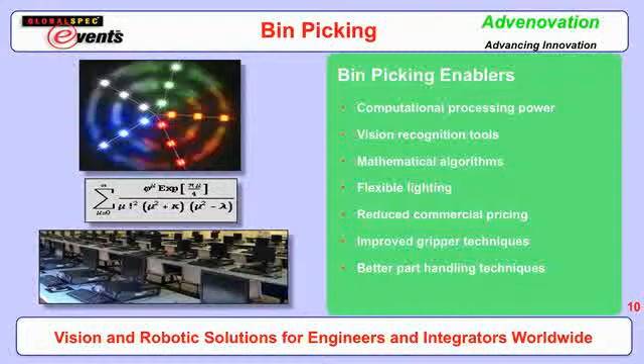In industry, these are some of the enablers that are causing bin picking to become easier. But at the end of the day, everything must work, and I'll cover these issues as we go forward here.

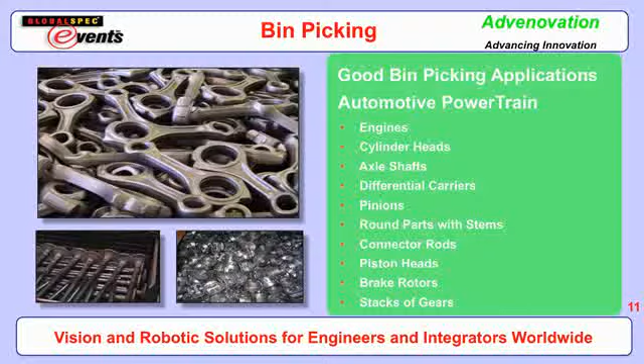Let me outline some good applications by certain vertical markets that already have been proven and are quite feasible to do: engine blocks, cylinder heads, axle shafts in powertrain, differential carriers, pinions, round parts with stems, connector rods, piston heads, brake rotors, and stacks of gears. These are parts typically found in powertrain applications, engine type related applications, and a lot of the key components that make up these powertrain products are bin pickable.

So that's a very encouraging sign. Next, let's take a look at automotive stamping. These are situations where flat metal is bent with heavy presses to form the shape of a door or a roof or a hood. Typically when these parts are stamped, we also get holes that are used to weld or join with other smaller parts.

Progressive stacked stampings are typically smaller parts that attach or are welded to a bigger part like a door, and usually they're supplied in bins with some skew to them just to facilitate a lot of parts in the same bin. Those have also become very feasible. And we are also seeing final assembly products in boxes in what are called trim chassis final environments or final assembly, which can be picked out of a bin and put into moving lines, moving conveyors.

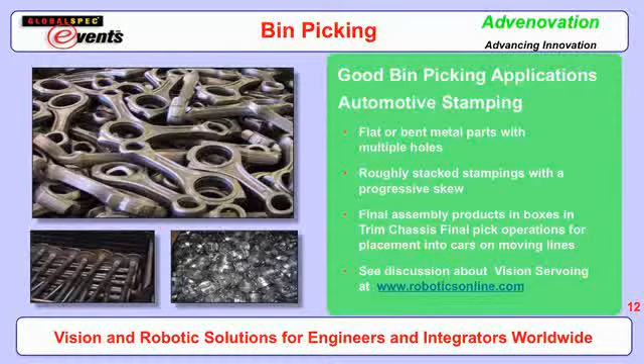Okay, let's take a look at a non-automotive example of packaging, food packaging. Strips of medical tablets, flat but randomly arranged in boxes. Sometimes, as you can see in the picture on the top left, these strips of medicine have one side with no features and another side that does have features or markings on it. Those are all feasible to do now.

A second area, the one on the right up at the top, is bags of products such as chips or salsa or cheese. A lot of times these bags are used in intra-packaging operations where there are no markings. What's remarkable about these solutions is that these parts actually can change in shape also. It's one thing to find objects in different positions like X, Y, Z or yaw, pitch, roll. It's another to also have shape variation, but there are techniques to deal with that becoming more and more feasible.

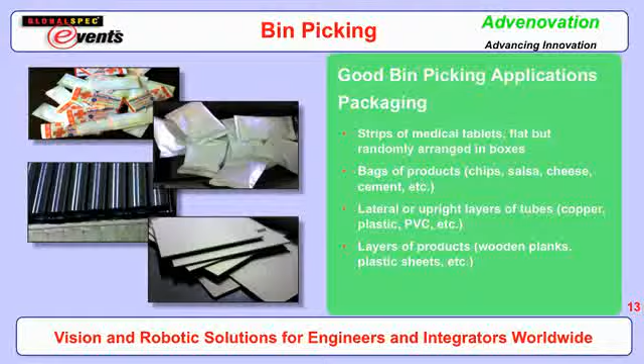A third example of packaging is lateral or upright layers of copper, plastic, or PVC pipes. They typically don't have holes or features on them, but just by virtue of the fact that they are lines in space, or their cross sections are circles in space that are skewed, allows vision algorithms to make bin picking possible. Finally, at the bottom right, we see layers of products such as wooden planks, plastic sheets. These are also becoming feasible, and please note that they don't have features on them, we just have layers. So these different types of products and geometries are becoming feasible for bin picking.

All right, so let's go through a procedure of how to do bin picking. Let's say you have a manufacturing operation and would like to consider bin picking, to reduce the labor cost and improve your throughput and flexibility while still utilizing your old bins without modifying them. What would you need to do to see if you could do bin picking? Let's go through that procedure and see what it takes to do that. The instructions below are a bit precise, but they're not difficult to follow.

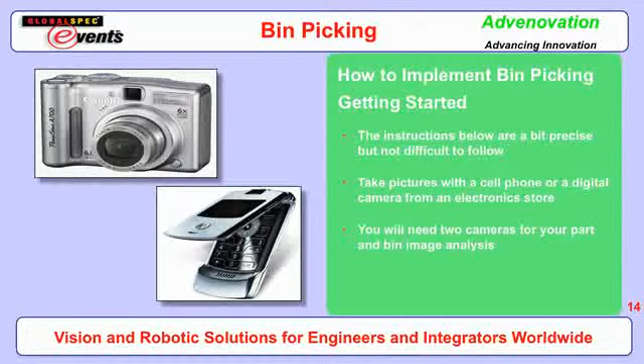It involves, first of all, taking pictures of your parts. So you'll need 2 cameras to do this, and they don't have to be industrial cameras. You can use typical consumer cameras or cell phone cameras. The first thing to look for, for every part that you manufacture, is its resting positions.

Consider each part that you may manufacture. You may have many, and for each one of those parts, consider the multiple stable resting positions which can occur if you were to put it on a flat surface, and document that. For example, a Coca-Cola can typically has two resting positions: one when it's standing up on its circular footprint, and the second when it's lying down on its side.

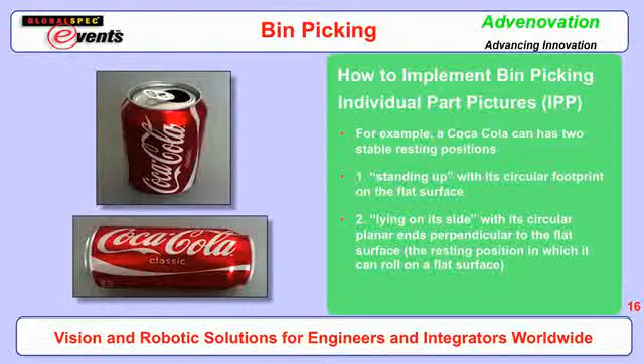Those are two stable resting positions of a Coca-Cola can. Now in a bin, of course, each one of those resting positions will be skewed in X, Y, Z, or yaw pitch roll, but the idea here is to identify stable resting positions and to think about grasping strategies for each one of those resting positions.

Here's another example of a piston head, which may take 4 different resting positions. So the thing to do is to take pictures of each stable resting position, aiming your camera at about 45 degrees to the flat surface so we can see some perspective, and collect this in a set of part pictures.

The second thing, now that we've looked at individual parts and their stable resting positions, is to worry about how random these parts can be. Sometimes they're not so random, they're just more or less skewed in a box. On the other hand, as you can see in this picture, these piston heads are quite random. So it's important to understand how random these parts are, and to review how randomly your parts occur in your manufacturing operation.

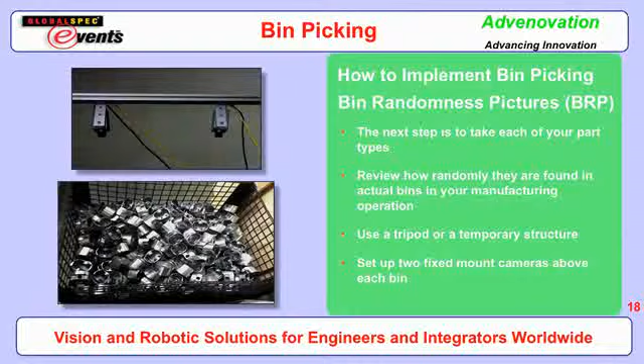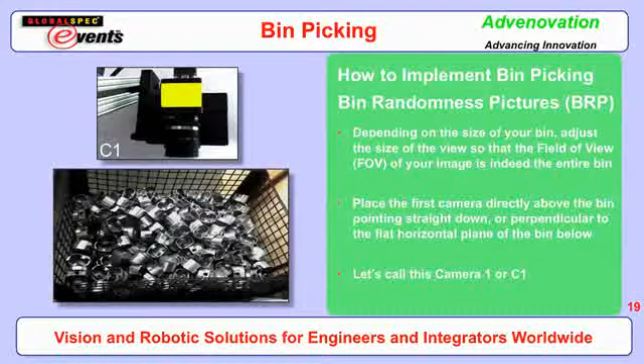Use a tripod or a temporary structure, set up 2 fixed mount cameras, and take the following pictures. Call one camera C1, and depending on the size of the bin, adjust the field of view so that your image captures the entire bin. Place the first camera directly above the bin, looking straight down in a perpendicular fashion as shown in C1, and document that as the perpendicular image. Next, use a second camera at roughly a 45-degree angle and take the same scene's picture, and collect that image too.

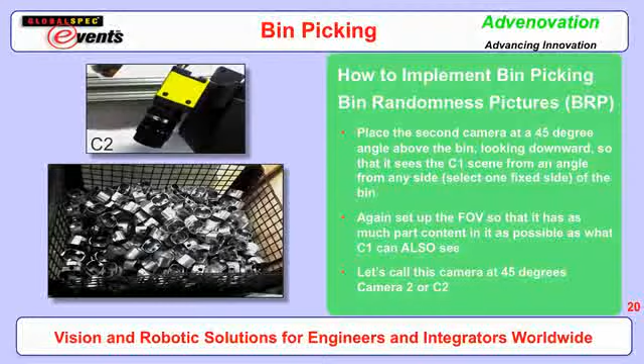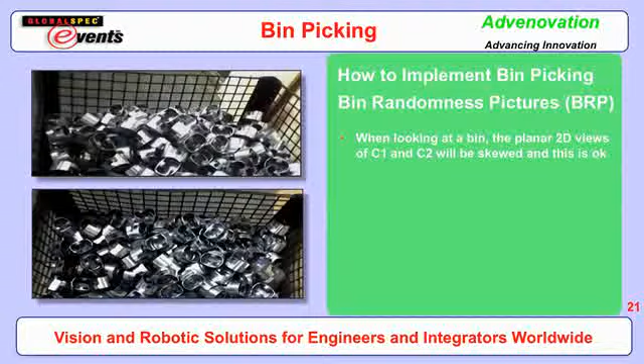So when looking at a bin like this with 2 different cameras, the planar 2D views of the 2 cameras will be skewed, and that's okay. The important thing is to document these in a file structure so that for every part style you have the individual part pictures, stable resting positions, and 2 sets of pictures for each part showing how randomly they occur in bins. This is some basic homework needed to assess if bin picking is possible or not.

So for each of your parts, place a bin, collect these images, and organize these things.

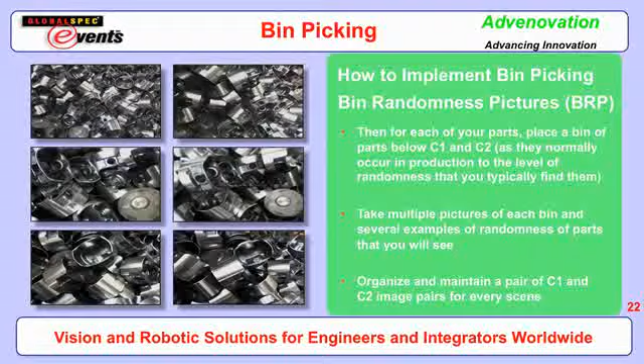The next thing to do is look for bin picking experts. There's a growing community of bin picking experts out there, so you can Google search them, and they form your potential pool of vendors that can supply you with bin picking solutions. It's important to make sure they have past work they can show, because there's quite a bit of hype out there, and it's important to verify that people touting they can do bin picking indeed have a track record. A good place to find such people is also at trade shows, conferences, webcasts, and open houses.

Okay, so the first thing to do is to supply this data that you just collected. Find all your parts, all these pictures. You may need to assess what are your high volume parts. Perhaps you don't want to do all of them in one shot. Maybe you want to pick your top runners that form the bulk of your manufacturing, or the bulk of your cost of manufacturing.

And then go ahead and approach these folks and ask for an evaluation of your parts from the pictorial information you've collected, and obtain a budgetary estimate to see what the cost will be to do this. And then if the payback on investment is justifiable, then proceed with additional steps.

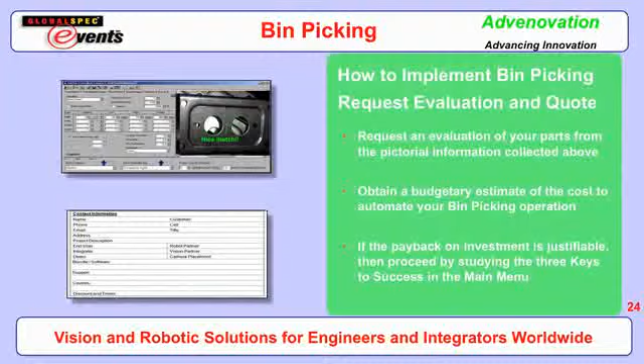So let's say the financial aspect is justifiable. Then the first thing to really do, and this is a critical part of bin picking feasibility, is to insist and expect to get a demonstration of bin picking with your parts. You may need to pay for this in a 2-week, 4-week, or 3-week engineering exercise, but it's very important not to rely on similar parts, because geometric differences can create a big difference in feasibility or not.

Case in point, I was personally involved with some connecting rods, and not all connecting rods are made equal. One type was very feasible and the other took a lot of effort to do. Ultimately they were both successful, but it's very important to insist on having the confidence to see a demonstration with your parts. You may need to pay for it, but the deliverable is that you can really see for sure that it will work for you.

Okay, now in bin picking there are several roles in the actual implementation. Sometimes these roles are fused into one or two companies, but if you just look at the roles themselves, there are several.

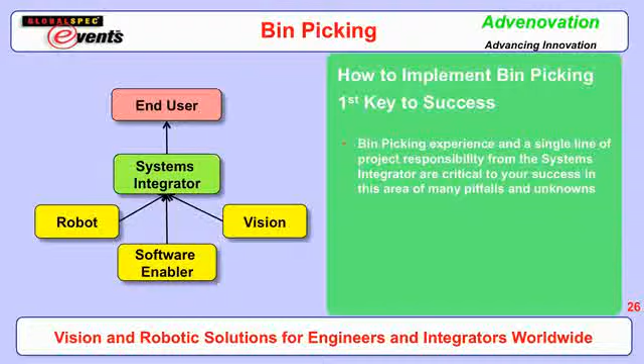The key pieces are a robot, a machine vision system, and most importantly for bin picking, software. Some integrators can do the robot and vision piece without a problem, but may need to rely on a subcontractor to provide the software for bin picking. This is not uncommon, but at the end of the day you want a single line of responsibility delivering to you.

Now there are several very good companies out there, as I've mentioned: Fanuc, Sony, Stäubli, National Instruments, KUKA, Motoman. These are all well established players. Again, the key thing is to make sure the roles of the end user, the integrator, the robot/vision company, and the software company are all covered and everybody's comfortable.

One thing these demonstrations do is bring about a lot of cooperation, because everybody's interested in a sale, and it's very important to see how the demonstration works out. If it works out, it's also a bit of a blueprint for the actual integration, in terms of where the cameras will go, what types of cameras there will be, and some of the tooling aspects. Collectively it creates a sense of confidence on how to approach a particular problem.

It also protects the success for all parties, in that not only is the end user interested in their success, but the suppliers also have their reputations tied into a project, and it's important for them to feel comfortable that they can deliver on the specific project, specific geometry, and specific level of randomness in the parts.

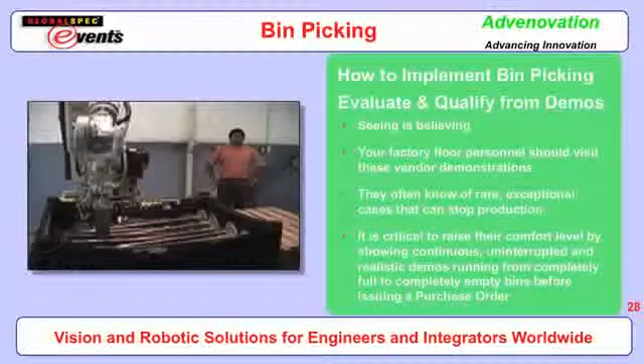I also encourage you to go and visit factories where bin picking is taking place. There are several factories out there now using bin picking. Some may not allow visitors for confidentiality reasons; others are quite happy to show their successes. It's useful to go talk to these folks and see how they implemented things, and get their perspectives in terms of support and training, logistics, and how they time the project around critical production commitments.

A second key to success.